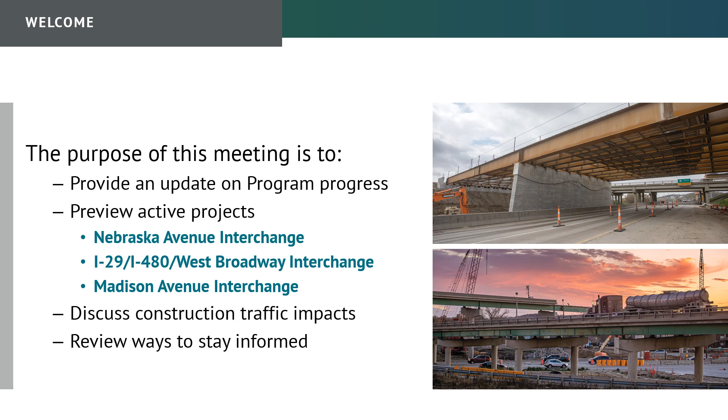Iowa DOT District 4 is responsible for the planning, engineering, construction, maintenance, and operation of interstates, U.S. highways, and state highways for 17 counties in southwest Iowa. District 4 maintains 703 bridges and 3,792 lane miles of highways. There are 17 maintenance garages throughout District 4 and 2 resident construction offices, 1 in Council Bluffs and 1 in Creston.

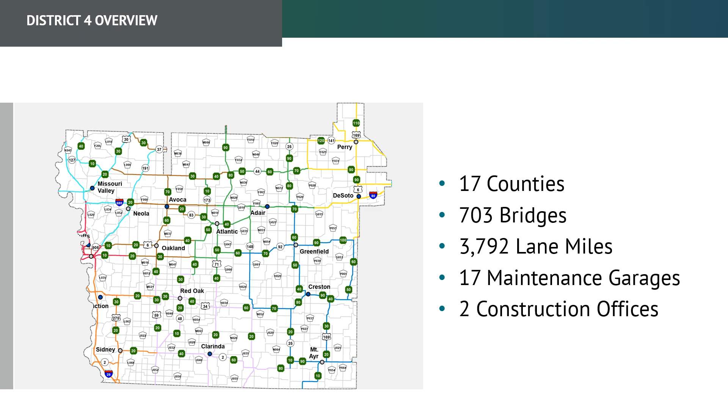Iowa DOT is in the process of reconstructing I-29, I-80, and I-480 in the Omaha Council Bluffs metropolitan area. This comprehensive interstate redesign will modernize the highway system and improve mobility and safety in the area.

The interstate system was originally constructed in the 1960s, and there have been only minimal improvements and upgrades since that time. In 1997, a study was started to assess the needs of improvements to the interstate system in the Council Bluffs area. In 1999, the assessment concluded that the interstate system was outdated, did not meet current standards, guidelines, or operational criteria, and does not have adequate travel capacity. In 2002, the Council Bluffs Interstate System Improvement Program was initiated by Iowa DOT and design began. To date, the program has completed 29 bridges, 9 miles of interstate, 6 interchanges, and 115 lane miles of highway.

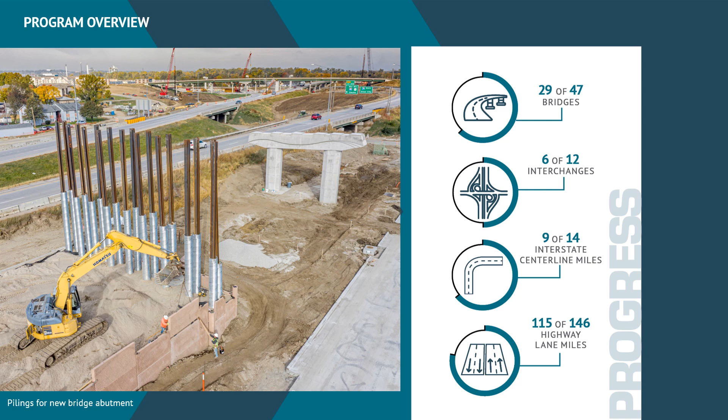Iowa DOT is in the process of reconstructing I-29, I-80, and I-480 in the Omaha Council Bluffs metropolitan area. This comprehensive interstate redesign will modernize the highway system and improve mobility and safety in the area.

The Council Bluffs Interstate System Improvement Program is one of the top priorities for the Iowa DOT. The program strategically schedules projects to streamline and expedite the program as a whole, which means less disruption to the traveling public. Ultimately, this means the Iowa DOT will produce a better interstate system quicker and more efficiently. In June 2021, the Iowa Transportation Commission approved $65.6 million for fiscal year 2022. Full funding for Madison Avenue will be reflected in a new program to be approved by the Commission soon.

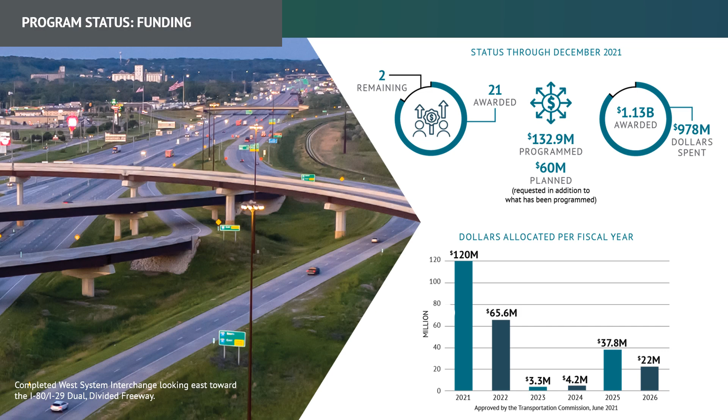During 2021, many projects were worked on throughout the year. The Nebraska Avenue work continued last year and work switched from the northbound lanes to the southbound lanes. In April, work began on the I-29, I-480 West Broadway project, and by winter, the new northbound frontage road was opened, and I-29 northbound was closed. In July, the dual divided freeway was fully open to traffic, and work was completed near South Expressway.

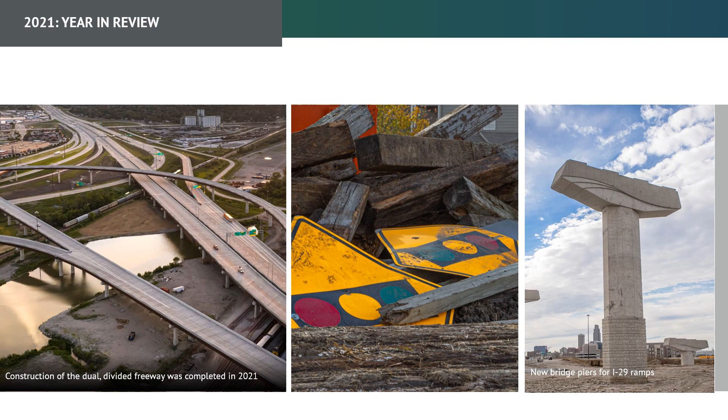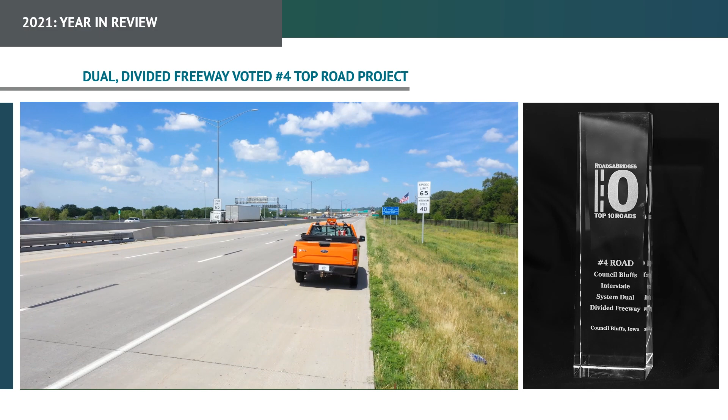The Iowa Department of Transportation is proud to announce the completion and opening of the I-80, I-29 dual divided freeway in Council Bluffs. The dual divided freeway is the marquee feature of the Council Bluffs Interstate System Improvement Program. It's a 3-mile stretch of the interstate through Council Bluffs that separates I-80 through traffic from I-29 local traffic, thus creating the I-80 express lanes and the I-29, I-80 local lanes.

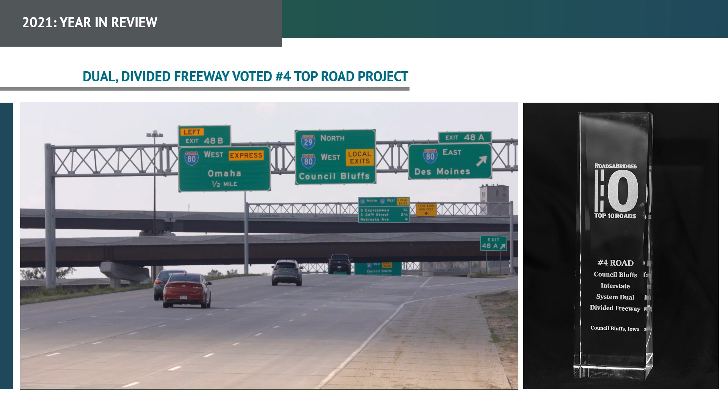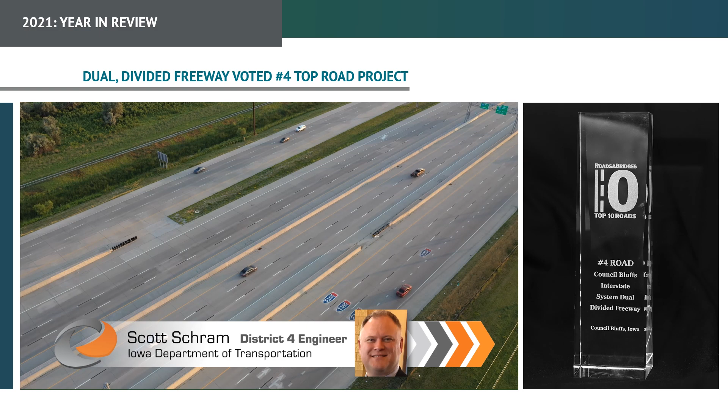Travelers can expect 3 lanes in each direction for the express and an additional 3 lanes in each direction for the local, that carries I-29 and I-80 local traffic. The right-hand exits and entrances are there to improve safety and driver expectancy.

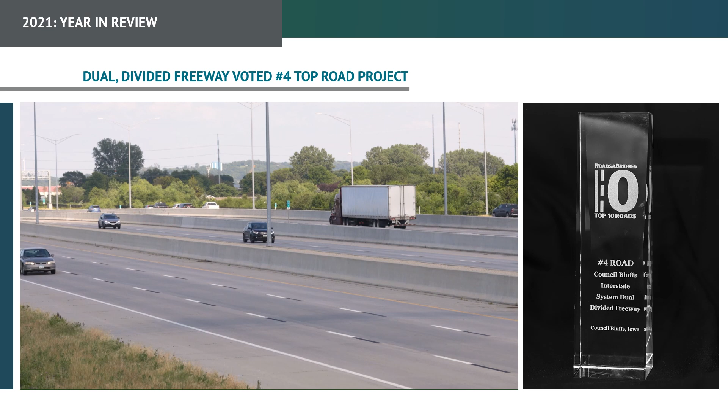We've got pavement markings that include high contrast skip dashes. These are easier to see during the daytime when you've got the black on white on the gray concrete, as well as glass beads that reflect light to make them more visible at night. We've also included some gates between the express and local lanes that allow traffic to move from one system to another should we have a crash.

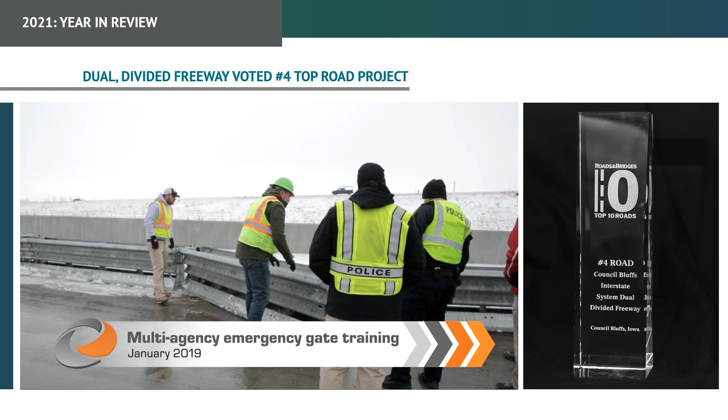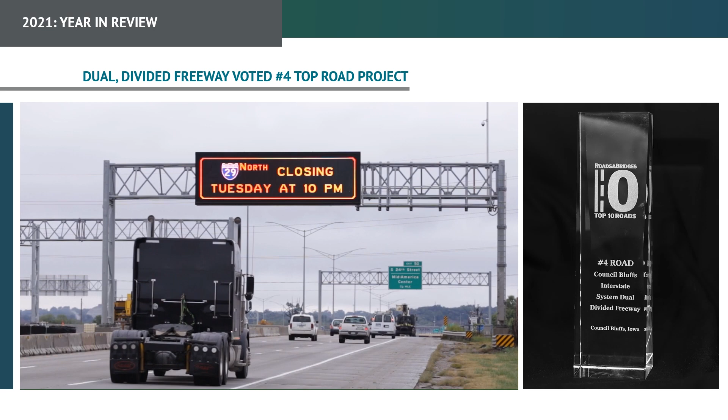In addition to those improvements, there are also other improvements that travelers may or may not see. Those include color dynamic message signs, which help us create tailored messages for traversing the dual divided freeway system. We've also included LED lighting, which helps with traveling during nighttime operations, but also saves energy. And finally, we've also been able to increase the speed limit to 65 miles per hour.

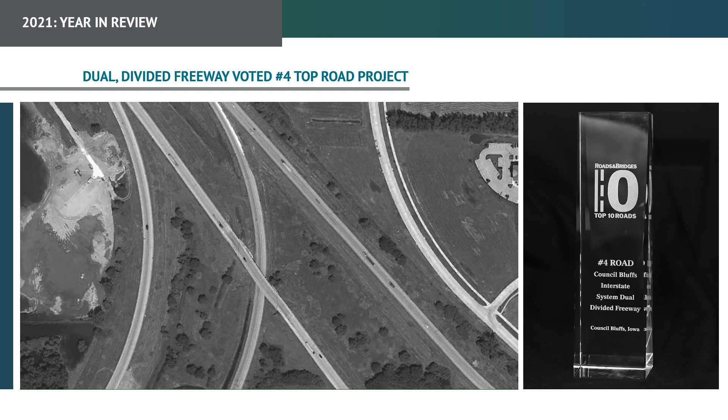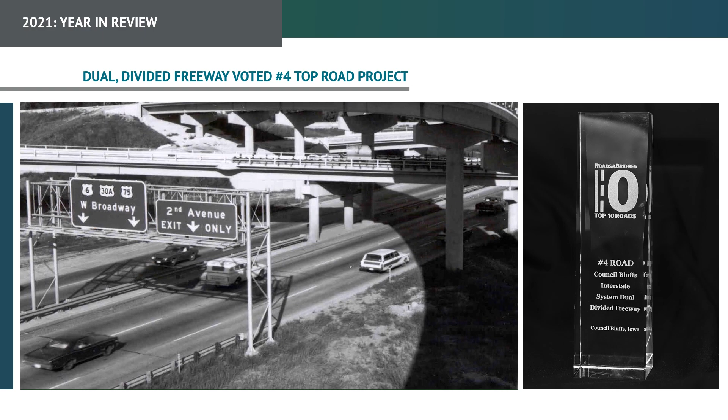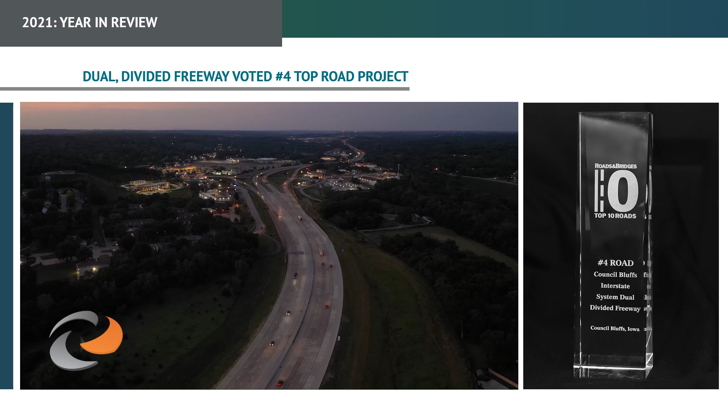The dual divided freeway was needed because if you remember back when the interstate was 2 lanes in each direction, there were a lot of daily backups. In addition to that, there were several left-hand exits and entrances that created issues for driver expectancy and ultimately led to some safety issues. In addition to that, the interstate was originally constructed in the 1960s, and even though there had been some routine maintenance done, no real reconstruction or updates had been done to the interstate since it was originally built.

I would say probably in early to mid 2000, we were starting to look at reconstructing the entire interstate within Council Bluffs. One of the concerns that we had was really a tight spacing of 2 system interchanges with Interstate 80 and I-29, significant corridors within Iowa and within the nation. This is a complex project. We had to manage budgets. We had to stay on schedule.

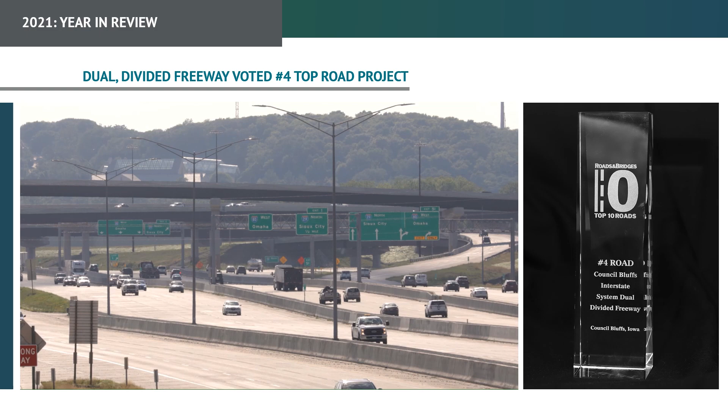We had several contractors working together, getting them to complete all of their milestones so the next contractor could come in and complete his.

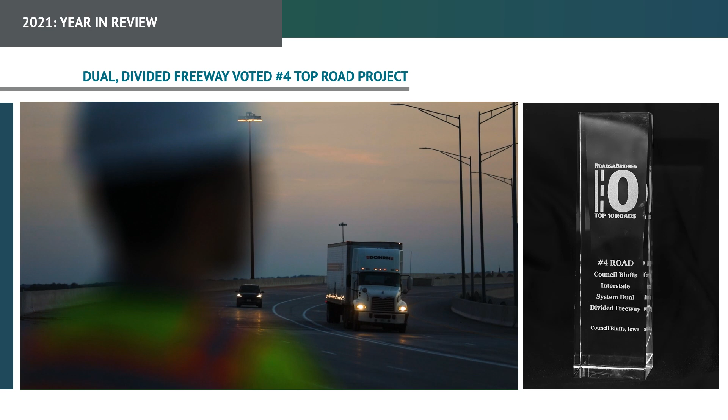We had to keep enough lanes open to satisfy our capacity needs throughout construction, so we had multiple lane shifts and multiple closures. We had to keep everybody informed, and finally we needed a signing and wayfinding strategy to allow travelers to navigate safely and easily through the dual divided freeway.

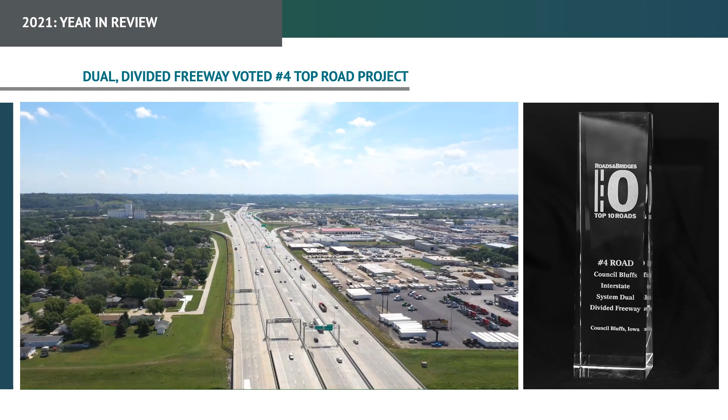Probably drive it at least once a week. I would have to say that I'm more pleased than you can imagine in terms of seeing it first on paper and now really seeing it at its completion. It operates wonderfully. I'm just glad to have had a part and opportunity in creating this infrastructure.

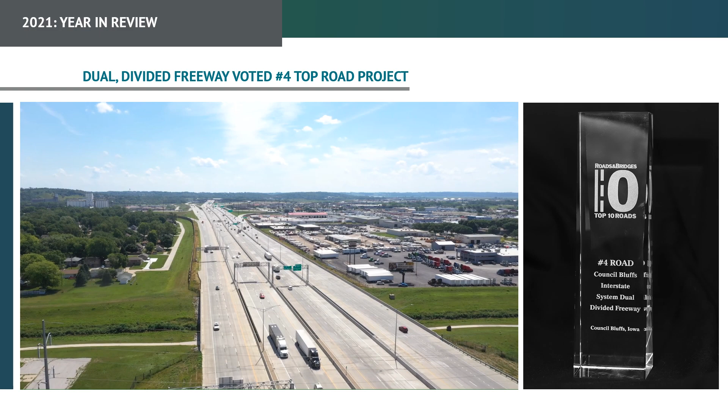This project couldn't be accomplished without our partners such as FHWA, City of Council Bluffs, MAPA, Army Corps of Engineers, Federal Railroad Administration, emergency responders, and of course our contractors.

We want to thank our community and travelers for their patience during the construction of this exciting project, and hope that this project has a positive impact on your travel in and around Council Bluffs.

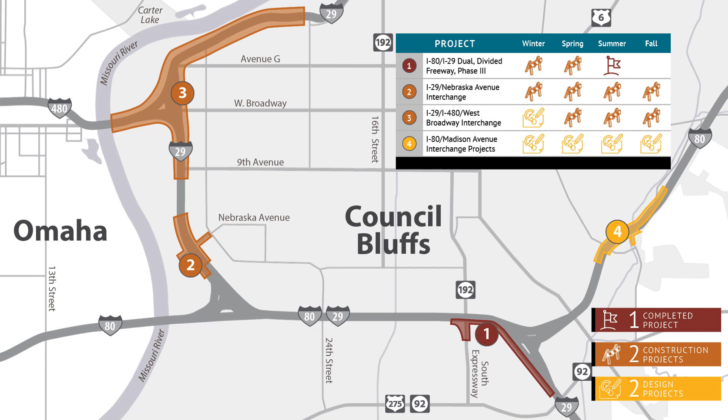Increased construction also increases the amount of work zones throughout the area. Various conditions will be present through the construction season and drivers should be aware of what to expect. To protect other drivers, construction workers, and yourself, it is critical to use extra caution when driving through a work zone.

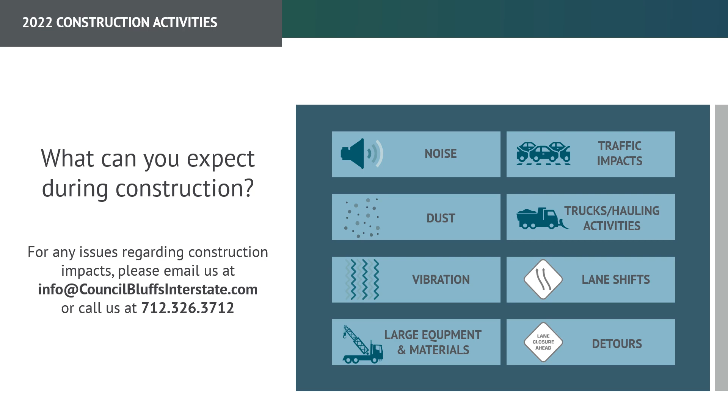Construction began on the Nebraska Avenue interchange in fall 2020. The reconstructed interchange will be similar to the existing interchange configuration, with 2 loop ramps and 2 diagonal ramps north of Nebraska Avenue.

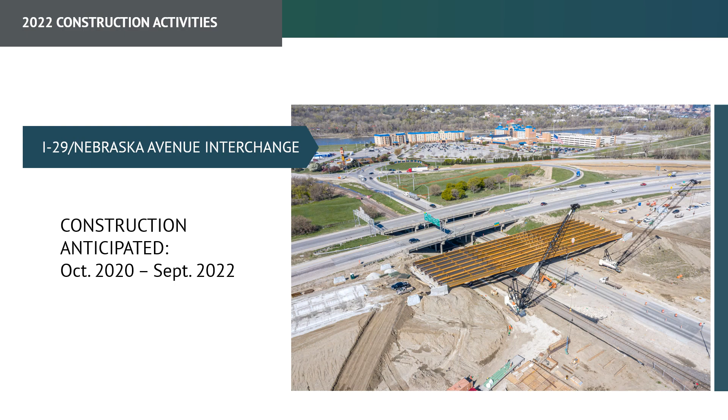In May, traffic will be moved to the new southbound lanes near Nebraska Avenue. The ramp to I-29 southbound will be closed when traffic is shifted, for up to 3 weeks, while the connection to the new lanes is completed.

Drivers can also expect various overnight closures for bridge demolition and traffic reconfigurations.

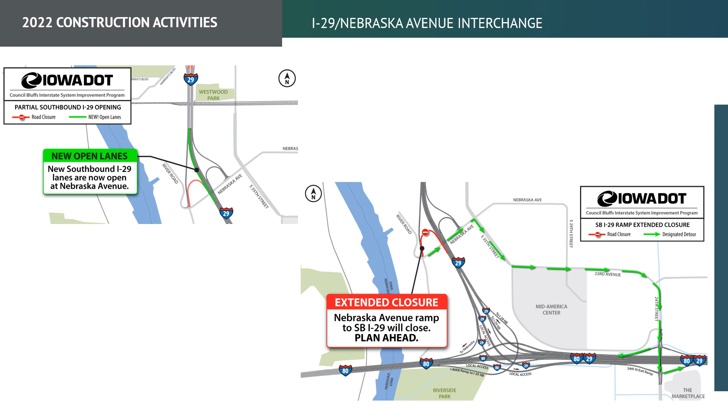I-29 northbound was closed in late 2021, and a portion of I-29 southbound was closed early this spring. Residents will also encounter minor closures to city streets in the project area.

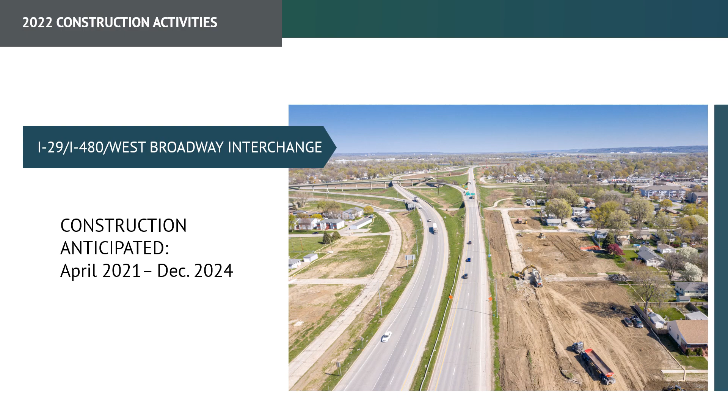Many additional short-term closures will occur in 2022, such as the I-480 eastbound ramp to 41st Street, which will be closed until early September, and 41st Street to the I-480 westbound ramp, which will be closed until early June.

41st Street between Dodge Riverside Drive and the I-480 westbound ramp will be permanently closed, and a new roadway will open in early September at 40th Street under I-480.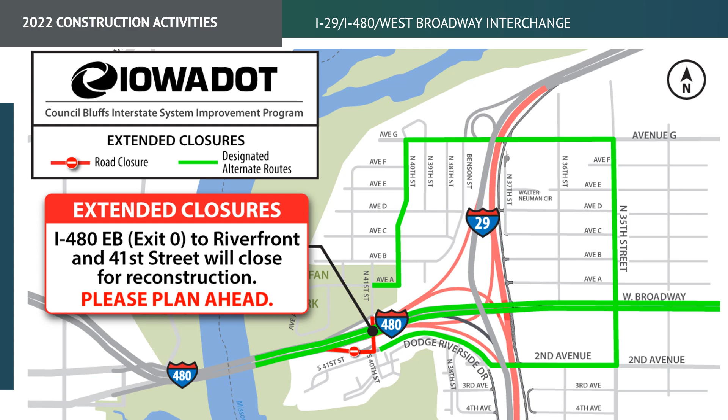Dodge Riverside Drive will be closed for approximately 30 days for reconstruction in July. The Avenue G ramps will be closed in August so that the southbound frontage road can be constructed through the area. In November, I-29 southbound will be closed at the newly constructed frontage road.

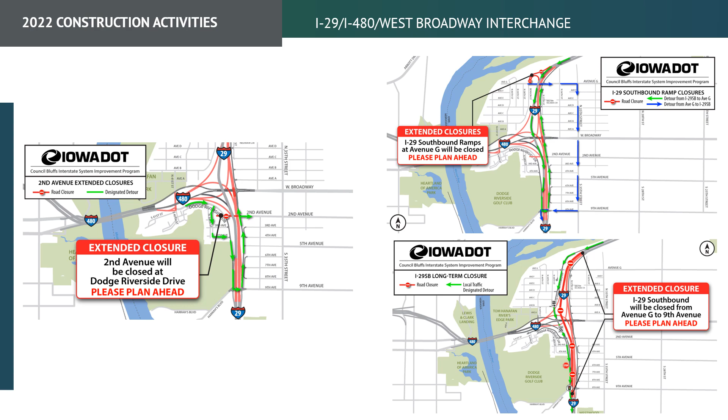The new West Broadway alignments will open in May and June. The new I-480 eastbound to I-29 southbound ramp will open in September. And in November, the new I-480 eastbound to I-29 northbound ramp will open.

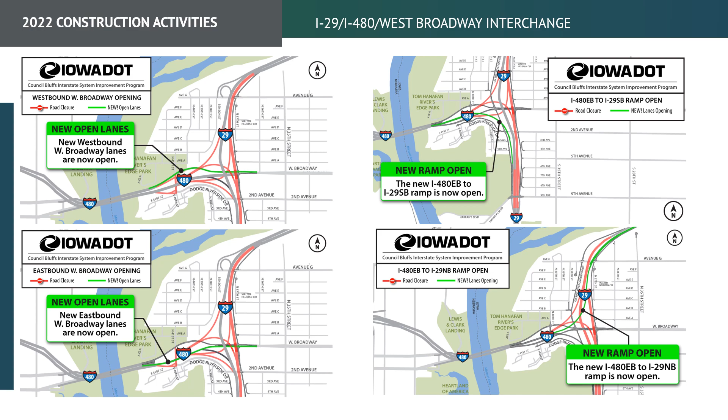Construction of the Madison Avenue interchange is expected to begin later this year. The reconstructed interchange will be a tight urban diamond with a similar configuration to the existing interchange. This project will also include construction of longer acceleration lanes when merging onto I-80.

The project has been divided into two contracts that will be awarded in late 2022 and early 2024. Construction is expected to be complete in 2026.

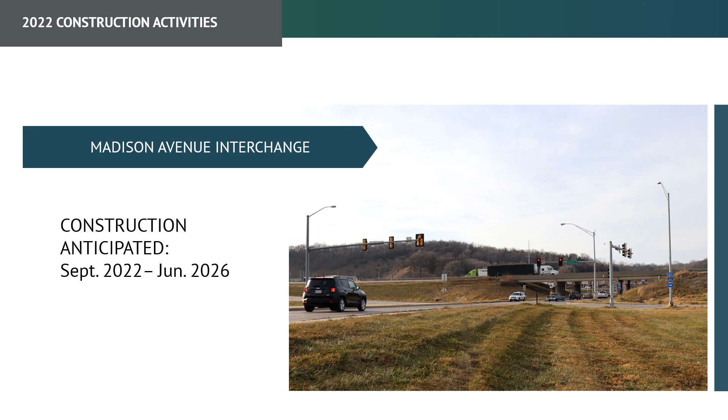Since 2014, the program has been providing informative, timely, and concise communications to stakeholders and the traveling public throughout the region.

This public engagement approach capitalizes on opportunities that communicate the thoughtful planning and execution of taxpayer dollars. Program, traffic, and construction-related information is shared with the public through a variety of in-person and online platforms.

In 2022, we will use a mix of proven outreach techniques with the addition of regular updates provided to individuals who live in the project area. New methods to reach our residential audience include direct mail and e-news updates. Stakeholders and businesses will also be provided with materials that can be shared with customers, employees, tenants, and vendors.